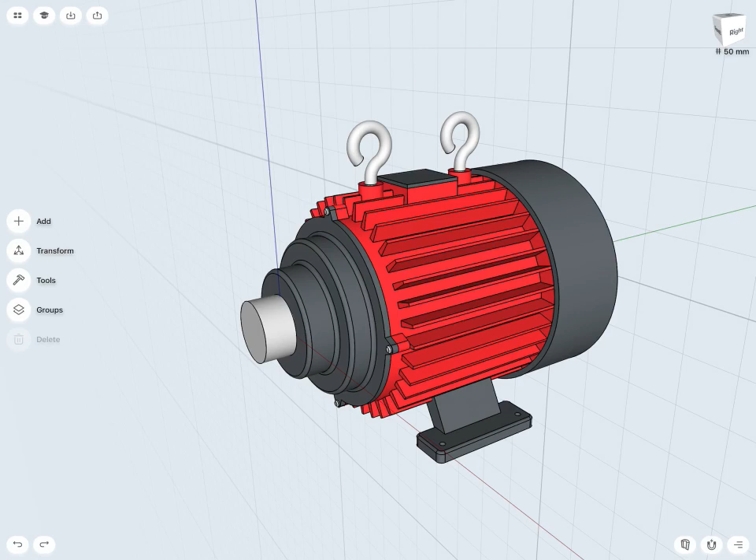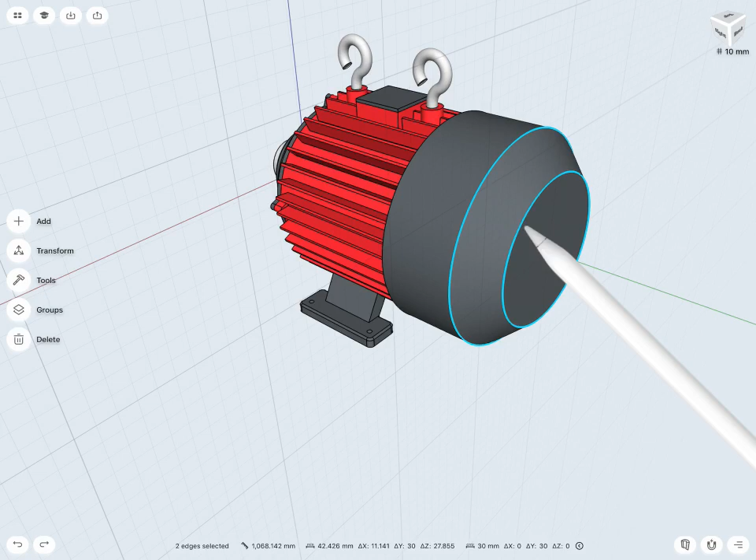In this lesson, let's take a look at creating the fan pattern on the back of our end cap here. So it's going to be a fairly complex sketch, and before we get started, I might just want to do some final touches on my end cap, so maybe just add some fillets to my two edges here as an example. I'll say fillets of about 10 millimeters or so.

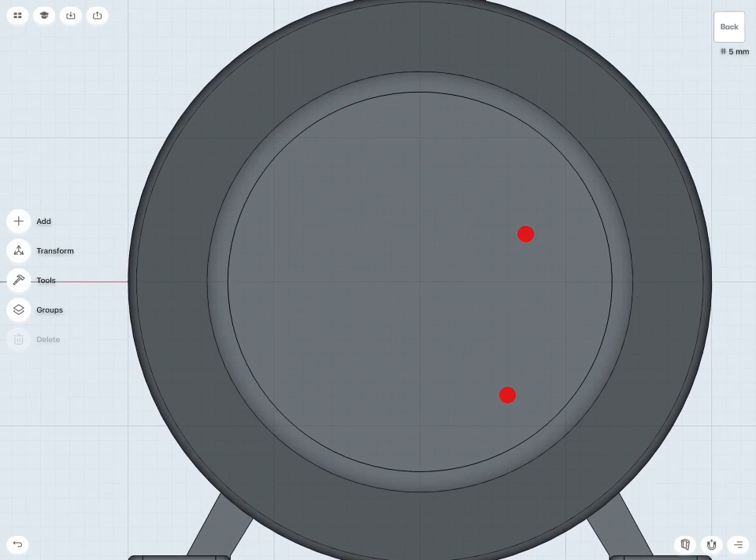And then I want to start my fan sketch on the back of this end cap here. So maybe I'll just double tap on that surface there and start my sketch. I might start by drawing a straight line up from the center point of my circle all the way up to the top of my circle there. And notice that the moment I've snapped my new sketch line to an existing body's edge, an additional sketch will be created along that circular edge, which I can now use in my sketch.

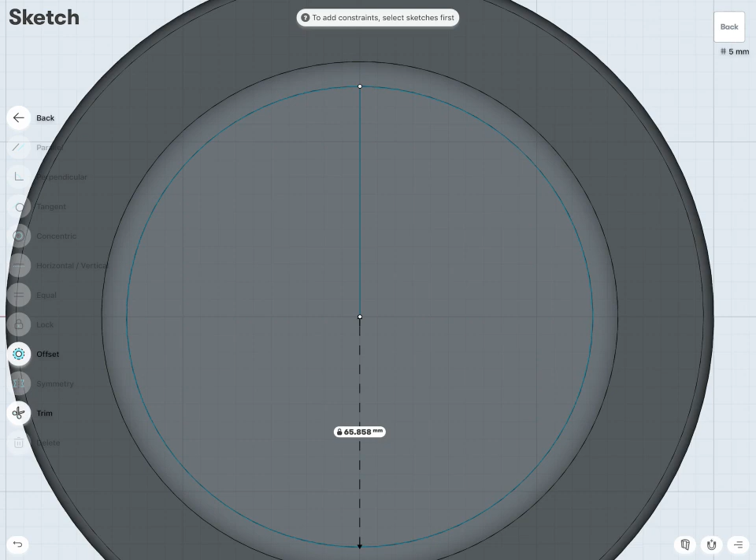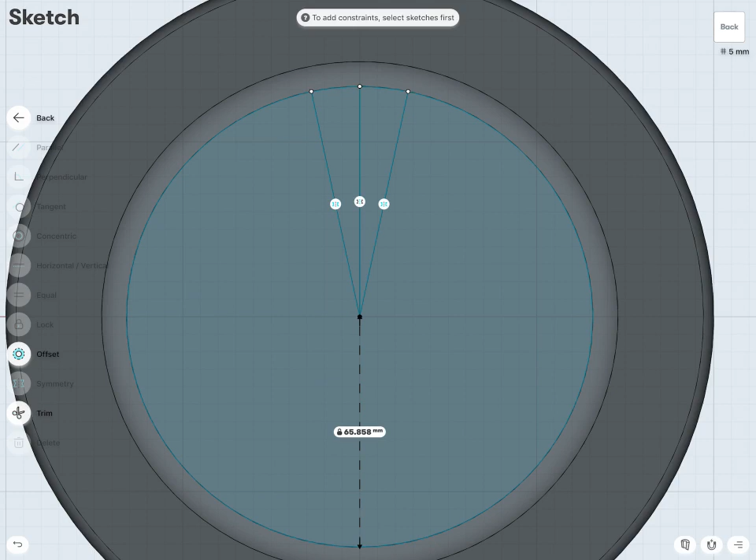I'm going to draw two angled lines going to the outer edge of my circle here and here. And then I'd like those two lines to be symmetrical. So I'll tap to select both lines, use the symmetry constraint, and then select that first line as my line of symmetry. And now we can see our two symmetrical lines coming in with those constraints as well. I might want to throw in an angle, so I'll tap to select both angled lines and throw in an angle, let's say maybe a 20-degree angle.

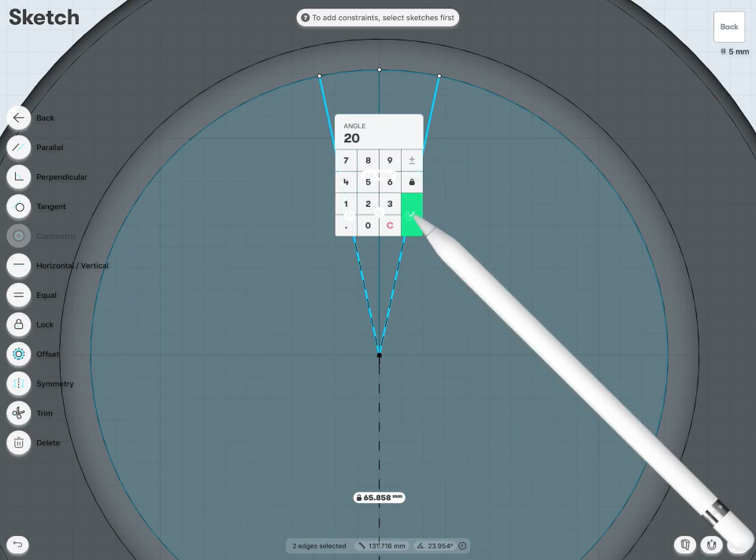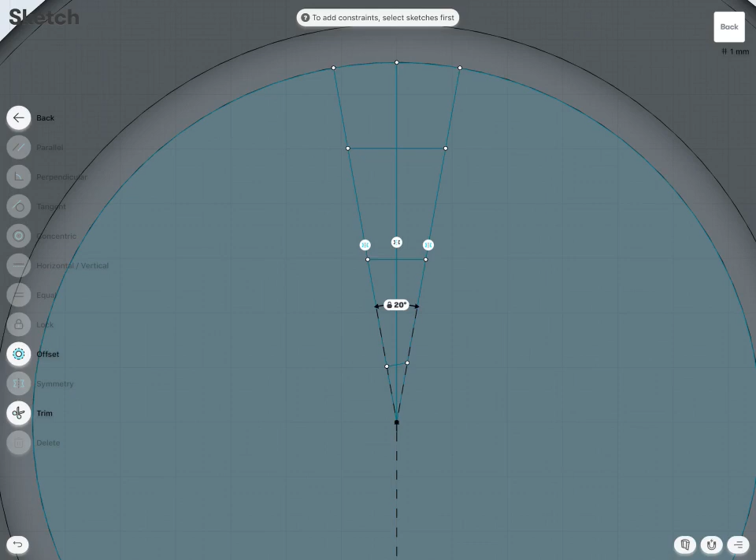Okay. And then I'm just going to draw a few horizontal lines, which are going to be my cutouts for my fans. So maybe I'll draw one about here, one about here, and one about here. Okay, make sure all three of those are horizontal, so I'm going to add my horizontal constraints if needed.

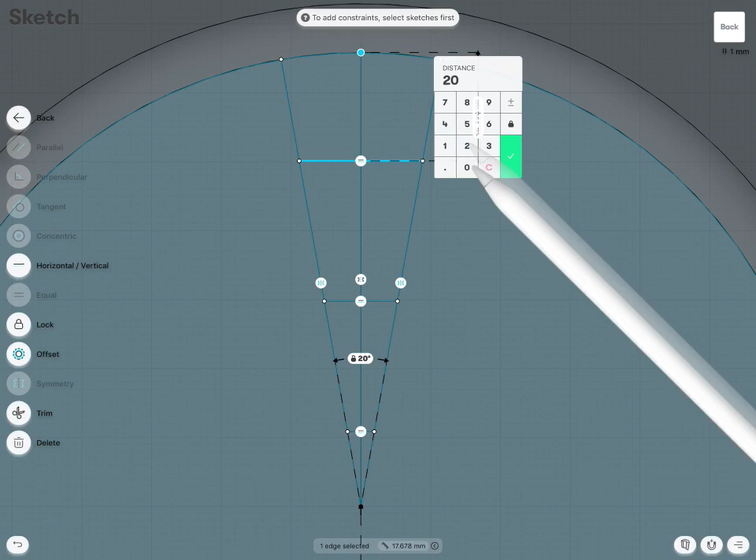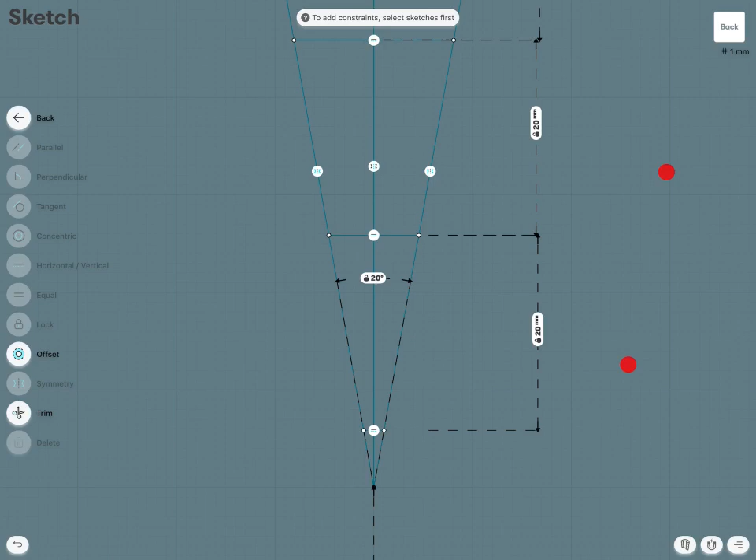And then maybe I want to finish that off with some dimensions. So from my first horizontal line to the top point of my circular edge, let's say I want that to be 20 millimeters. And same idea from my second line to my first line, again 20 millimeters. And same idea with my final horizontal line up to my second line, about 20 millimeters as well. So I think now that throws in pretty much all the constraints and dimensions I may need.

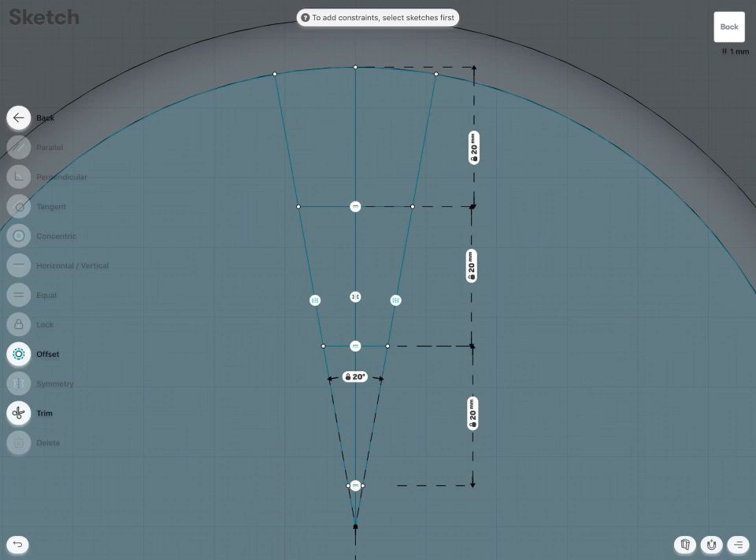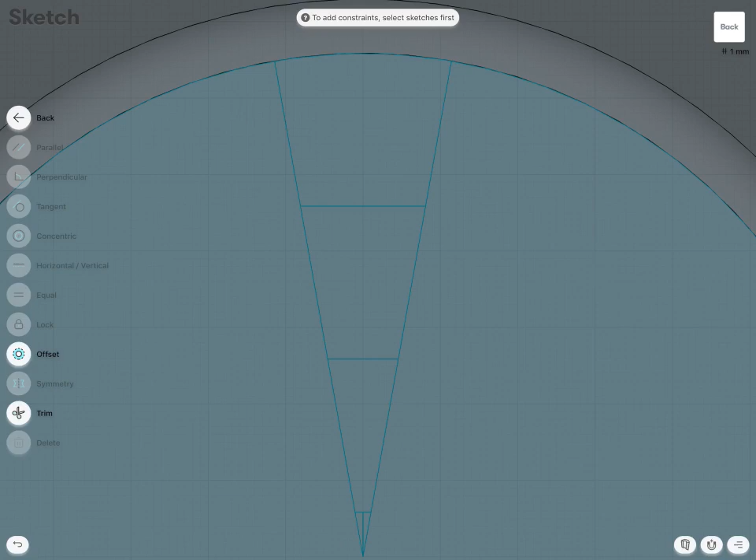And then what I'm going to use here is the offset tool to create the cutouts for my fan pattern. So what I might want to do first is use my trim tools. I'm just going to trim this line, this line, this line, this line here. And tap the done check once I'm happy with my trims. I trim that just so it makes my offset command a little bit easier. So now if I use offset, I can drag any edge or any face. If I grab just this edge here and pull in a little bit, notice it's offsetting that entire shape of my sketch. That's why I trimmed away that internal line, because I didn't want to offset that one as well, just these four outer edges.

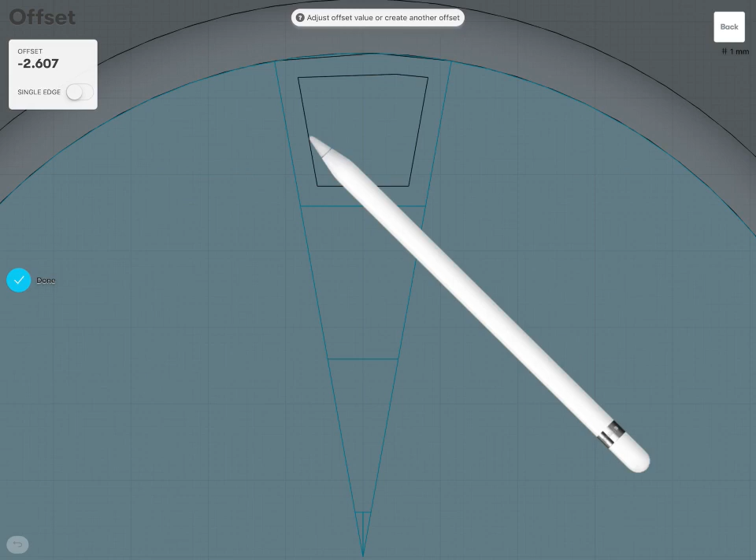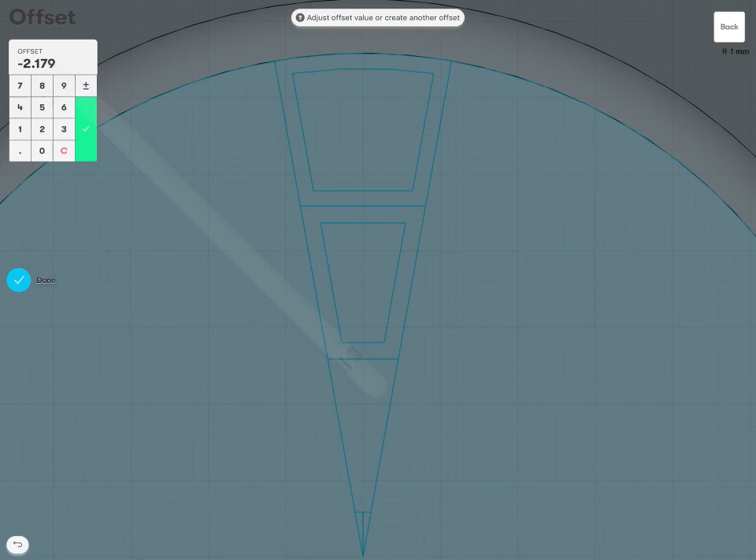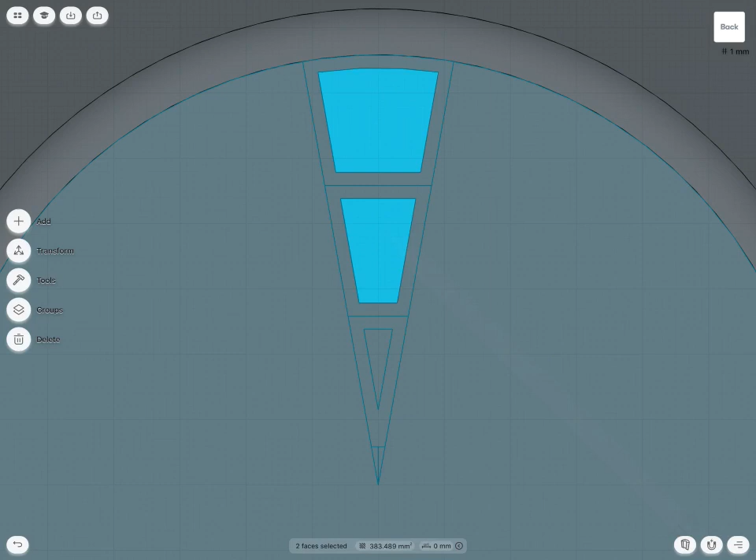So I can offset this to whatever degree I'd like. Let's say an offset of 2 millimeters. And same idea here, 2 millimeters. And here as well, 2 millimeters. So those three shapes are going to be the main shape for the cutouts for my fan pattern. So now I can tap the done check mark, and essentially use these three shapes and make copies to pattern all the way about my end cap.

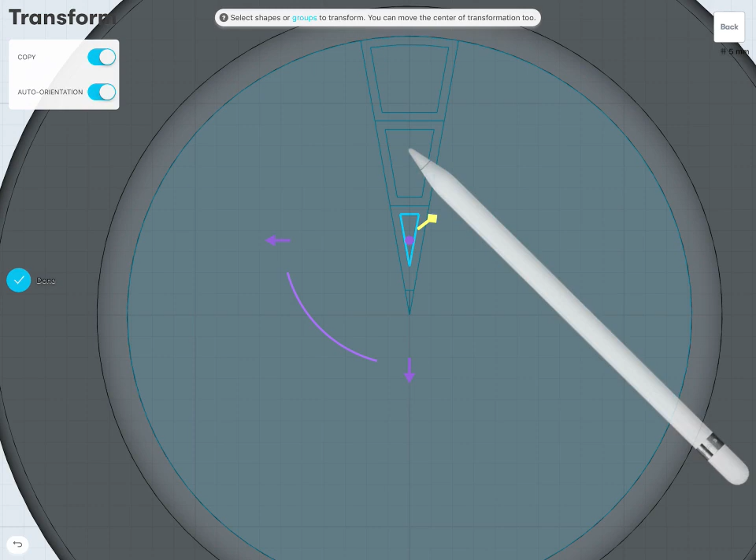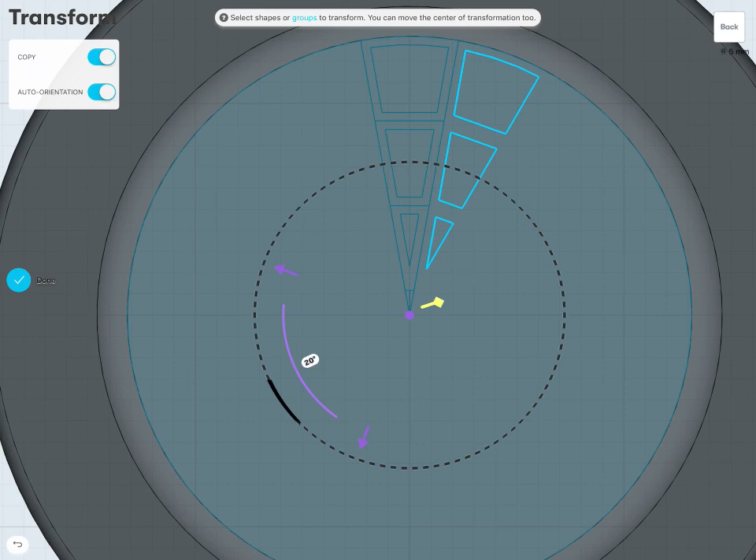So I can go to transform and go to move, rotate, scale. And just as we've seen a couple times already, I probably want to turn on the copy command. I'm not transforming groups or shapes in this case, but the sketch itself. So grab the aspects I'd like, these three shapes, move my pivot point to wherever I'd like, in this case dead at the origin, and then just rotate as needed. I'd want it about 20 for each copy. So 20, then 40, then 60, and so on until we've copied all the way about our end cap.

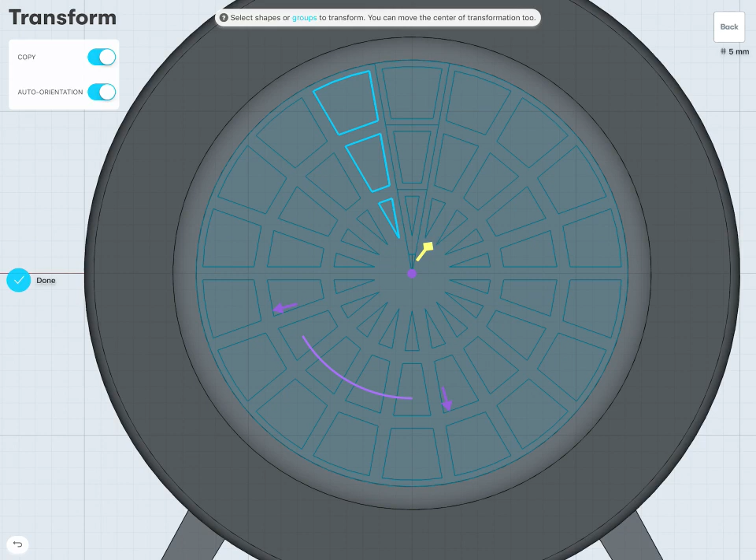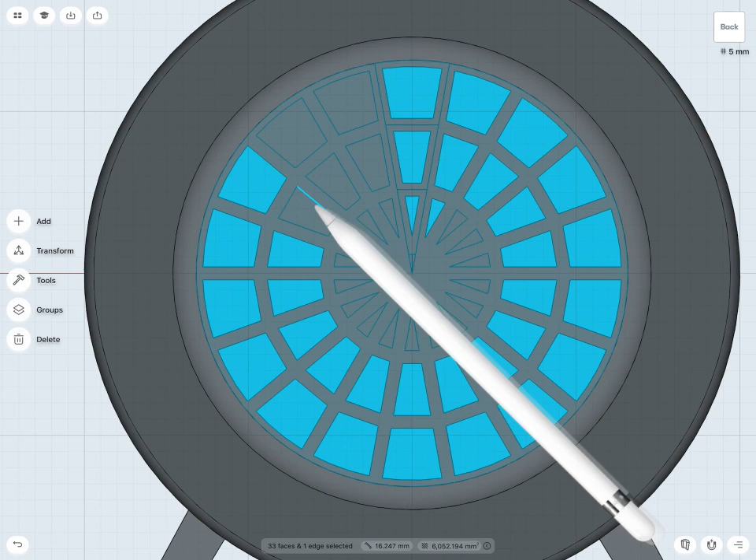Then once we have all of our fan cutouts sketched, I can tap the done check to finish off my transform tool, and use all of these sketch cutouts to cut out my fan pattern. So I just want to tap to select each and every one of these cutout sketches. And then once I've selected each sketch pattern, I'll just want to cut these away, and drag slightly to cut all the way through.

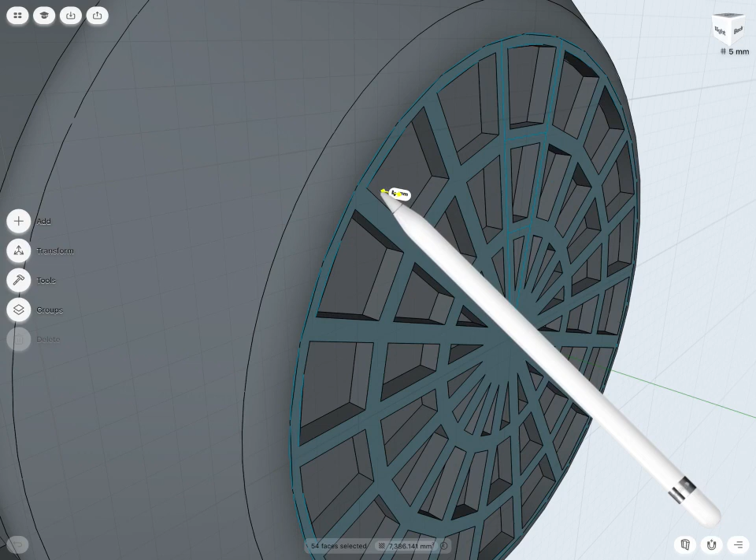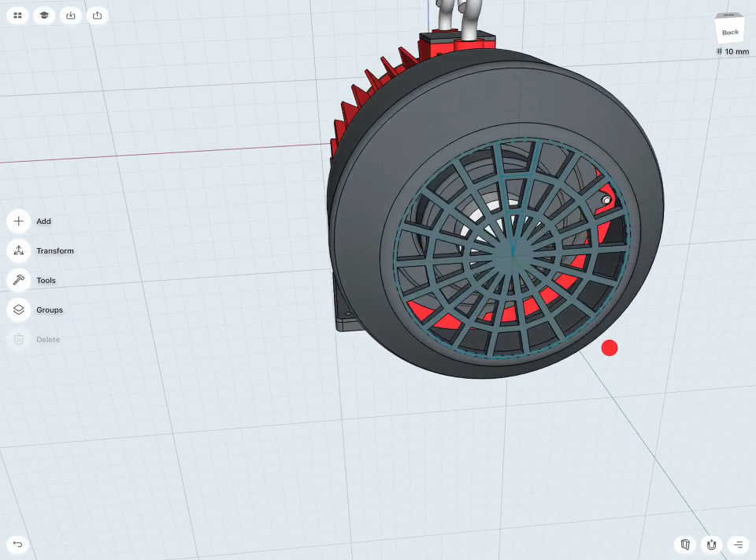And now we have our nice fan pattern on our end cap, and we can see a little bit of the internals of the rest of our motor there as well. So this was a fairly complex sketch in order to generate this pretty complicated geometry, but it was a fairly quick process.